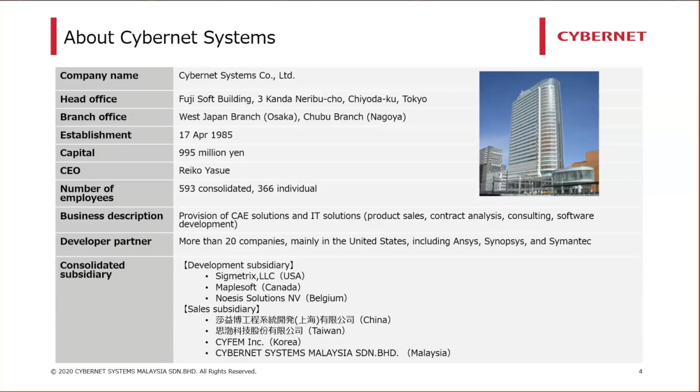We have developed partnerships with more than 20 companies, mainly in the United States, including Ansys, Synopsys, and Symantec. The sales subsidiaries of Cybernet Systems consist of Cybernet China, Cybernet Taiwan, CYFEM which is based in Korea, and of course Cybernet Systems Malaysia.

Cybernet Systems has been working with numbers of group companies around the world for both sales and development. Our development subsidiaries include Noesis, Maplesoft, and Sigmetrix. And of course, our sales subsidiaries consist of Cybernet Japan, China, Taiwan, Korea, and also Cybernet Malaysia.

A little introduction about Cybernet Systems Malaysia. Cybernet Systems Malaysia Sdn Bhd's office is in KL Eco City, located in Bangsar, and has been around for more than a year now. Cybernet Systems Malaysia was established in November 2018 as the fourth subsidiary in Asia, after China, Taiwan, and Korea.

Our business here mainly revolves around CAE solutions, IoT and big data solutions, and also professional services or engineering services. Our partners up until this point in time include Ansys, Synopsys, and many others.

Like I mentioned before, Cybernet Systems provides all sorts of solutions to meet our customers' needs. Those solutions are CAE solutions, which give total support of CAE utilization in various fields. The main application areas in CAE solutions include mechanical system, fluid system, control system, optical system, and also electrical systems. We also have AR and VR solutions.

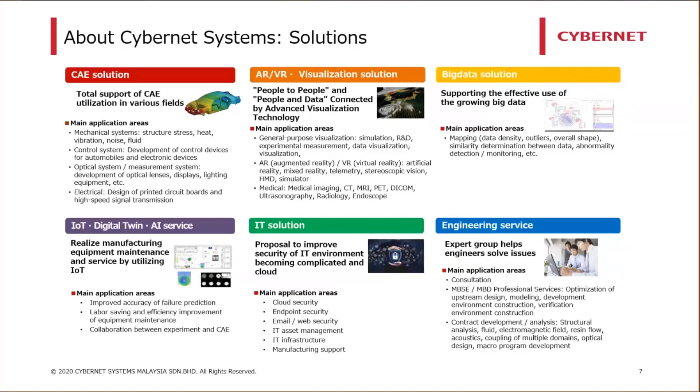This includes application areas around general purpose visualization, AR and VR, and also medical imaging. Then we have big data solutions, IoT, digital twin, and AI service, IT solution, and of course engineering service. Our engineering service is basically a group of experts that helps engineers solve issues. The main application areas include consultation, MBSE professional services, and contract development and analysis.

Before we get into how digital engineering can help improve the construction industry in several ways, let's highlight some of the demands from the end users and also the challenges faced by construction industries nowadays.

Now let's take a look at some of the demands and expectations from the construction industries by the end users. These are some of the important aspects, in my opinion. First, perhaps the most important aspect that needs to be taken into consideration when designing or building construction is safety.

Since the first industrial revolution, safety has been deemed to be the most important aspect in every industry. As the world gets more and more advanced, the demand for a higher level of safety standards keeps on rising as well. Therefore, the task of designing any kind of construction becomes more and more complicated and more challenging.

Next is to create more environmentally friendly buildings and construction. Nowadays, every industry is required to comply with a lot of standards and regulations that revolve around the environmentally friendly theme.

For this, the construction industry needs to be clever in tackling some of the environmental problems during the entirety of a project. It includes being smart in the choice of materials used, being smart when designing the building itself, logistics, and so on and so forth.

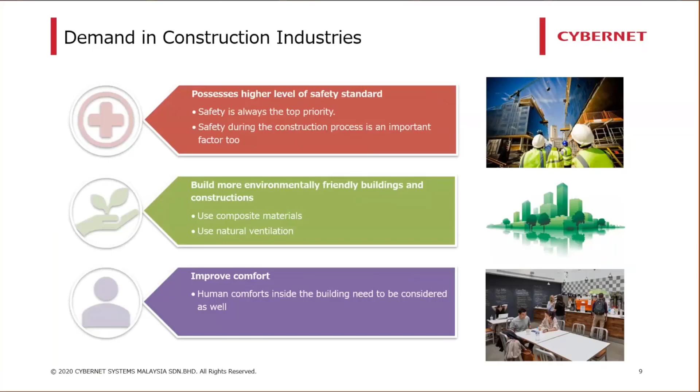And finally is to improve human comfort. When designing a building, how well a person inside feels can be a deciding factor whether there will be any occupant inside the building at all. This factor subsequently affects the whole project at the very end, and thus becomes an important factor to be taken into consideration.

Now, next, we take a look at some of the challenges currently faced by the construction industry. These challenges have been around for quite some time now. Common problems such as streamlining construction crew management and labor shortage are still a headache. But apart from those, there are some other issues the industry needs to tackle as well.

The first one will be technology adoption in the construction industry. When we compare how well industries adopt new technologies, construction seems to be lagging behind compared to others. As proved by the manufacturing industry, technology adoption opens up new opportunities for the industry to improve their way of working, subsequently boosting their productivity and ultimately improving their efficiency.

Now, next, let's talk about material costs. In 2018, some of the key materials for construction rose almost 10% from the previous year. According to the Associated Builders and Contractors, raw material costs rose by 2.2% in June this year.

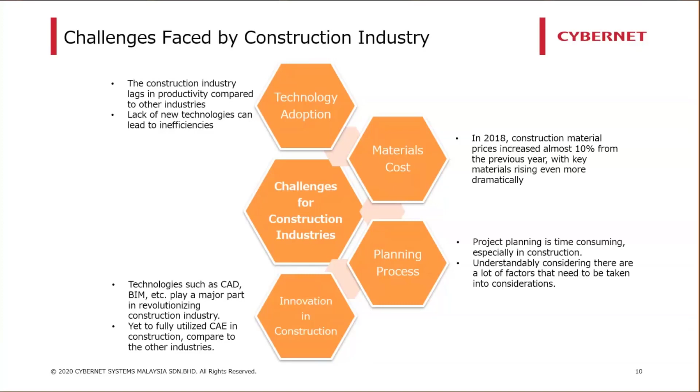The adoption of CAD and BIM was the last significant technological innovation in construction. Like I mentioned earlier, the demand from the end user makes for a more complicated task that requires more than just a traditional way of solving a problem.

Now let's dive into what is meant by digital engineering and how it can be beneficial for the construction industry. By definition, digital engineering is the advanced computerization of systems engineering practices. We can think of it as the art of creating, capturing, and integrating data using a digital skill set, from drawings and 3D models all the way to simulations. Engineers are increasingly using advanced technologies to capture data and craft designs in a digitized virtual environment.

Now, for today's webinar, we are going to focus on one aspect of digital engineering, and that is computer-aided engineering, or CAE. CAE is part of the broad definition of digital engineering. So basically, CAE focuses on creating a virtual world in which to simulate a real-life problem.

Now, unlike what many people think, CAE actually goes beyond the analysis and development stage. CAE actually defines the entire product engineering process, from initial design creation, through virtual testing with sophisticated algorithms, all the way to the maintenance process. It allows a dynamic testing process to support the engineering process by numerically simulating the physical properties of a product or design in various conditions and environments without the need to make a physical prototype.

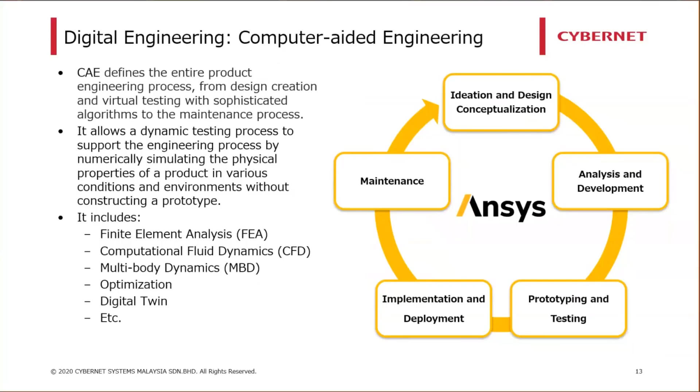So nowadays, getting access to a powerful, high-performance computer is not as big of a problem anymore compared to, let's say, 10 years ago. With that level of accessibility, I believe that every industry, including construction, should be able to use computer simulation software. Now, with that said, here are some several benefits of CAE.

The first one is that construction designs can be evaluated and refined using computer simulations rather than physical prototype testing, therefore saving money and time. What CAE can offer is to help engineering teams manage risk and understand the performance implications of their designs. Like I mentioned before, when the highest level of safety is required, CAE allows engineers to simulate almost every situation, leaving no room for errors.

Next, CAE can provide performance insights earlier in the development process, when design changes are less expensive to make. Predicting faults and failures is important in construction. With CAE, these failures can be predicted way before they even happen in real life, when the construction has already taken shape.

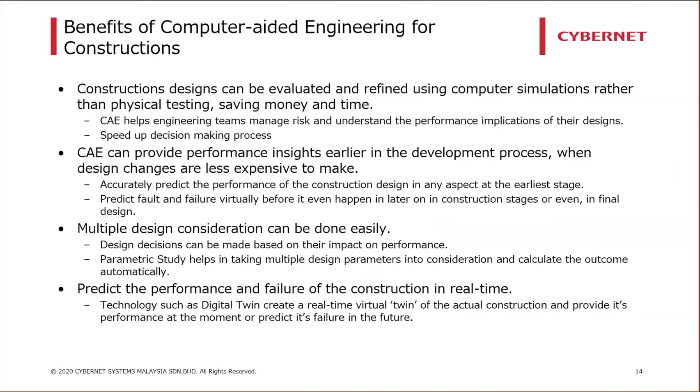Now, CAE has been around for a long time. Since the beginning, Ansys has been providing one of, if not the most, powerful and advanced CAE software of them all. Ansys specializes in simulating highly complex problems, delivering accurate results while providing an easy-to-use operating environment.

For 50 years, Ansys has been the class-leading multi-physics simulation software provider. Due to that very fact, Ansys now has over 45,000 global customers worldwide. Ansys is also used in a wide range of industries, including automotive, electric and electronics, aerospace, and many more.

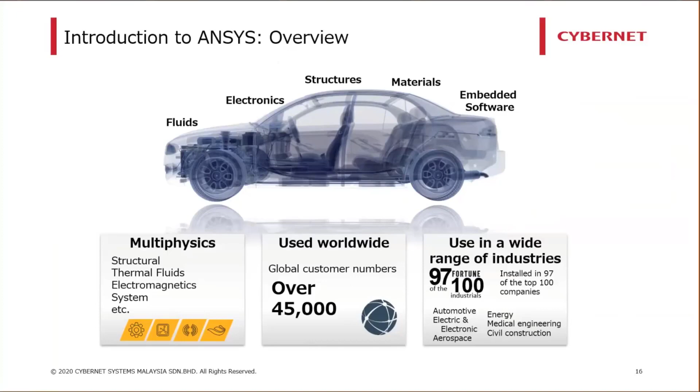As I said before, Ansys provides multiple physics simulations for every type of need. The physics include mechanical solutions, with analysis under mechanical solutions including static structural analysis, dynamic analysis, impact analysis, heat transfer or thermal analysis, fatigue analysis, and so on.

Next, we have the fluid solutions. Analyses included are general purpose thermal fluids analysis, rotating mechanical fluids analysis, and so on. Then, of course, we also have the electronic solutions, which include electromagnetic field analysis, signal integrity, power integrity, and electromagnetic interference analysis. Next, we have the design solution.

The design solution is mainly for designers and CAD users, done using the Ansys product called Ansys Discovery. Lastly, you also have several additional options included under the Ansys solution, which include a parallel computing module, material data selection library, and so on.

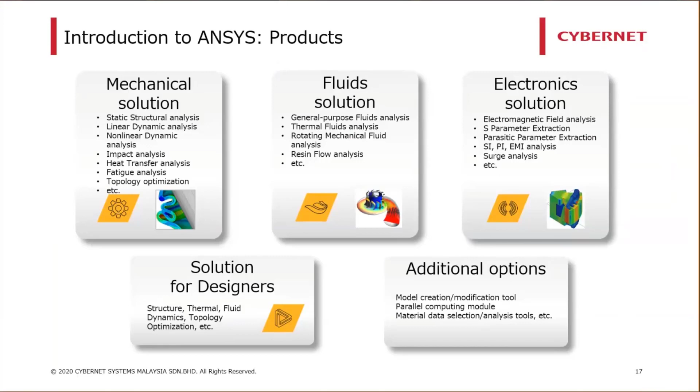Now let's take a closer look at how Ansys works by going through this next analysis. For this one, we have a model of a truss bridge. We were using Ansys Mechanical 2020 R2, which is the latest Ansys Mechanical software right now. As you may already know, structural and vibration analysis are part of the mechanical solution. As for the license for this type of analysis, we need at least Mechanical Premium.

Basically, there are three types of licenses for Ansys Mechanical: Mechanical Pro, Premium, and Enterprise, with Mechanical Pro being the entry-level license, and Enterprise the top-of-the-range license, which includes everything under the mechanical solution. You can check the Ansys website for full license capabilities.

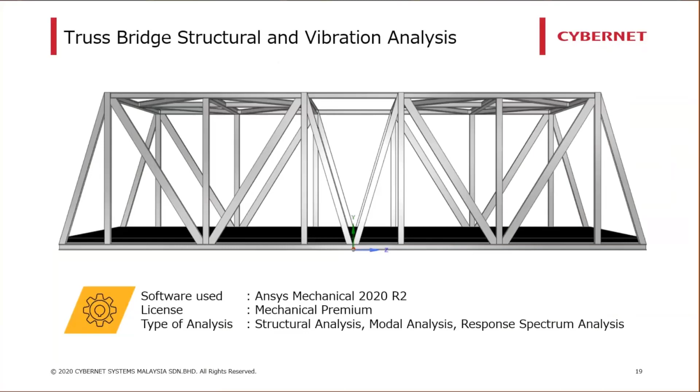As for the type of analysis included in this particular case, we have a structural analysis, modal analysis, and also response spectrum analysis. So basically, the objective here is to study the deformation and stress imposed on the truss bridge under a seismic load.

Here on the screen is the analysis workflow for this particular case. We started with a structural analysis to determine the pre-stress condition of the truss bridge under its own weight. Then we coupled a modal analysis to the static structural analysis to determine the natural frequencies and mode shapes of the truss bridge. Modal analysis is actually very important to determine the critical mode shape to be used in later analysis.

Finally, we coupled the response spectrum analysis to the modal analysis to determine the stress and deformation of the truss bridge under a seismic load. This type of case is made easy thanks to the ability of Ansys to link multiple analyses together. This way, the user doesn't have to manually key in the data from the previous analysis to the next one multiple times, thus saving a lot of time.

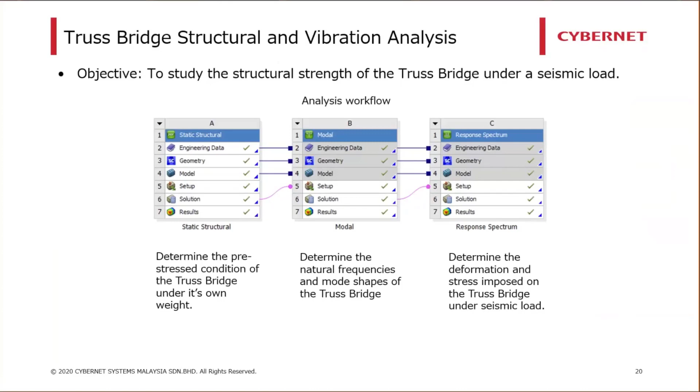Material used for this particular case are structural steel and also asphalt. Ansys has the ability to allow users to key in any type of material using its engineering data. Therefore, if users have material data at their disposal, they can easily key in those data inside Ansys.

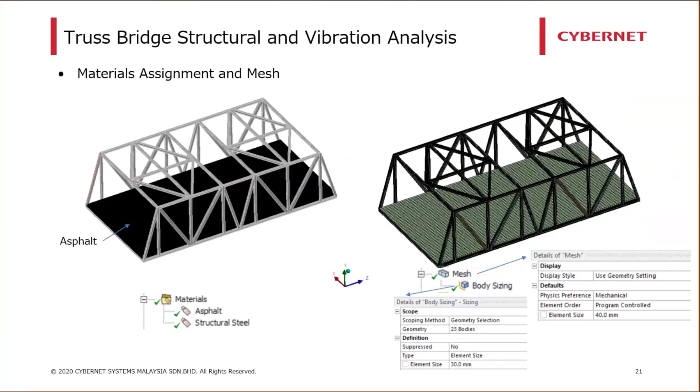Next, we get into the meshing of our model. Users can have a variety of mesh control. For this particular example, the global mesh was set at 40 millimeters, while a certain part of this model was meshed locally with a 30 millimeter element size.

Next, in the static structural analysis, we have the standard Earth gravity as one of the loading conditions. The whole model was subjected to a gravitational force. Then we fix both ends of our bridge here to basically fix the whole structure into place.

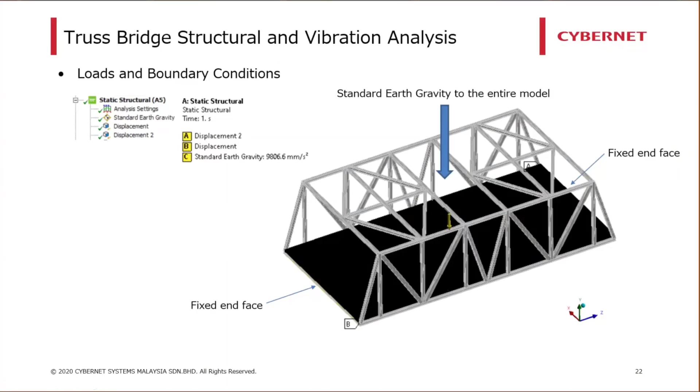After setting up our loads and boundary conditions, we continue with the calculation. The time needed for the calculation depends on several factors, including the number of elements of the model, the CPU speed, and also the number of cores that you are running with.

As for the static structural analysis, we just want to quickly study the deformation and stress of the bridge under its own weight. The maximum deformation is around 0.7 millimeter, while the max equivalent stress is around 76 megapascals, which is under the max yield strength of the material we are using. Therefore, in this condition, we can say that the bridge is safe to use.

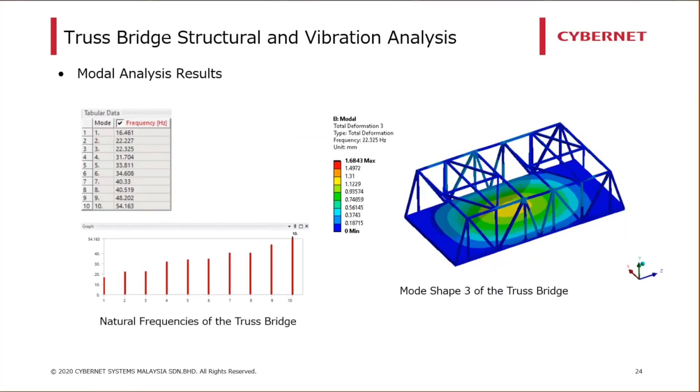So next we move on to the next analysis, which is the response spectrum analysis. Response spectrum analysis is basically a method to estimate the structural response to short, non-deterministic transient dynamic events, such as earthquake.

This particular seismic data sample that we are using here was gathered from a sample from Savannah River Site disaggregated seismic spectra.

Now, from the modal analysis, we know that the effective mass is the highest in the y direction. Therefore, the seismic load that we apply to our structure here is subjected in the y-axis.

Now, as for the mode combination method, we are using the Rosenblueth method, because the spacing of the modes are closely spaced together. And of course, in Ansys, different methods such as SRSS and CQC method can also be used depending on the model.

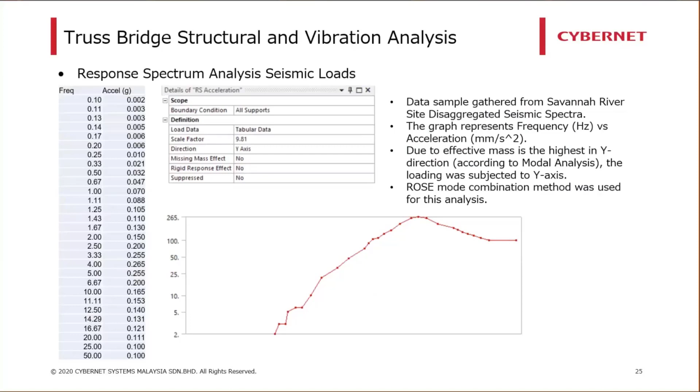Then finally, after running the calculation, we can see the results of the deformation and stress imposed on the bridge with the inclusion of seismic load. Note that these values of the deformation and stress are on top of the values that we get from the static structural analysis. In this case, under the seismic load that we just applied to our structure, we can say that the bridge is still within the safe side in terms of structural performance.

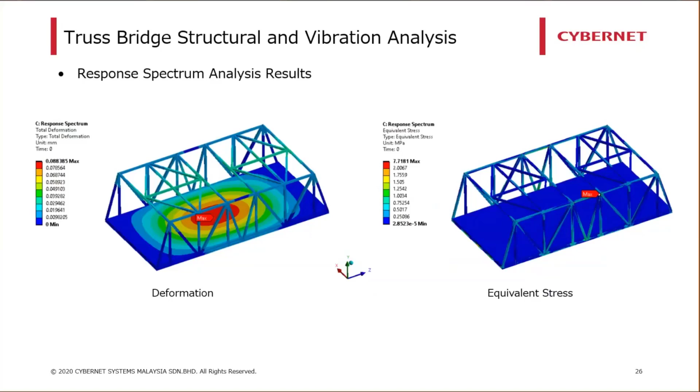So now let's continue with some more examples of Ansys capabilities. For the next part, we are just going through the results of the analysis and which Ansys product that we were using.

So here we have the first example, a fatigue analysis. This analysis is basically done to study the durability of a structure and its components. For this particular analysis, we were using Ansys Mechanical.

Almost the same as before, we were using vibration analysis, to be specific, harmonic response analysis, to see how long it takes before the structure fails.

Note that the model we are using here is actually a quarter of an actual model. You can imagine that this actual structure is symmetric in the XZ plane and also the YZ plane. This way, we can save a considerable amount of simulation cost because basically we are just cutting the whole model into 4, therefore cutting the simulation cost into 4 as well.

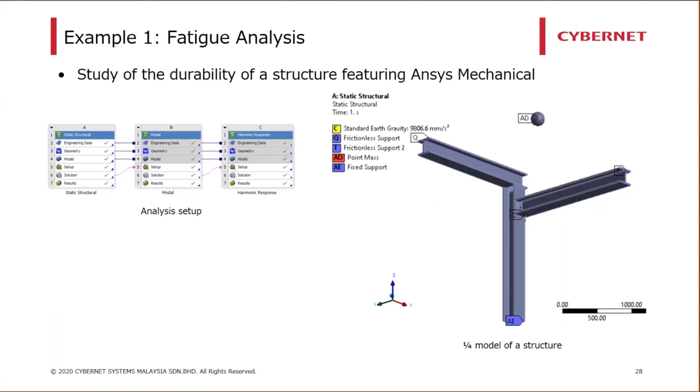Now, as for the loads and boundary conditions, a point mass was attached to the structure to simulate the weight applied to the structure, with the inclusion, of course, of the standard Earth gravity.

So here are the results from our analysis. On the left side, we have the stress from a static structural analysis before harmonic loads were applied. On the right side is the result of the stress imposed on the structure after we've done the harmonic response analysis. As you can see, due to the vibration input, the stress on the structure increased drastically.

Now, mind you that for this particular example, the harmonic loads are exaggerated a little bit, basically to simulate a worst case scenario.

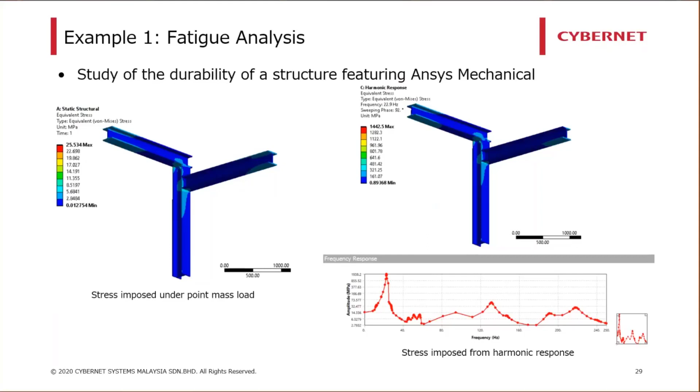Now, after we've done with the harmonic response analysis, we can start calculating the life of the structure using a fatigue tool. This particular tool is included in the Ansys post-processing, therefore it did not require an additional analysis cell.

From the previous analysis, we know that the maximum amplitude occurred at a frequency of 22.929, as you can see here. Using that information, we can calculate how long it takes before the structure fails.

As you can see, certain critical parts of the structure fail almost immediately, while the longest time that certain parts of the structure can survive was around 43,000 seconds.

With Ansys, we can also choose to view the results of specific components of the structure. In this case, we see that the bracket failed after 20.9 seconds.

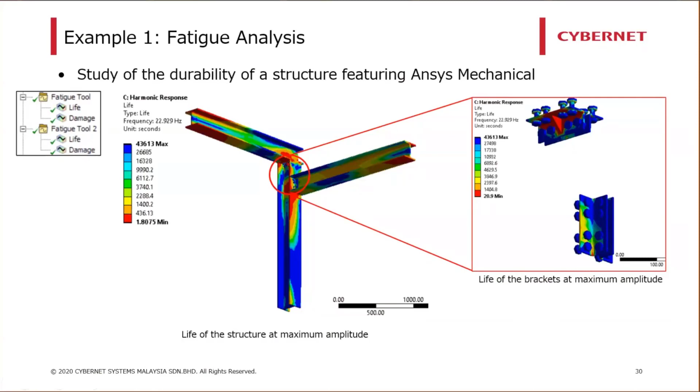So next here we have the explicit dynamic analysis. First, let me explain briefly about the difference between implicit and explicit dynamics. Basically, implicit and explicit refer to two types of time integration methods used to perform a dynamic simulation.

Implicit method is usually used when the problem time magnitude is relatively large, let's say about 1 second to 10 seconds, something like that. While explicit method is used when the problem time magnitude is really, really small - we are talking about a few milliseconds and even microseconds in some cases.

There are three products within Ansys that can be used for explicit dynamics. Those products are Ansys LS-DYNA, Ansys AutoDyn, and also Ansys Explicit Dynamics. In this particular example, we were using Ansys LS-DYNA.

Now, this example is about a concrete pier impact test. Because an impact test happens in such a short time, explicit dynamic analysis is required. The model that we were using includes the pier, which is made out of concrete and structural steel for the rebar.

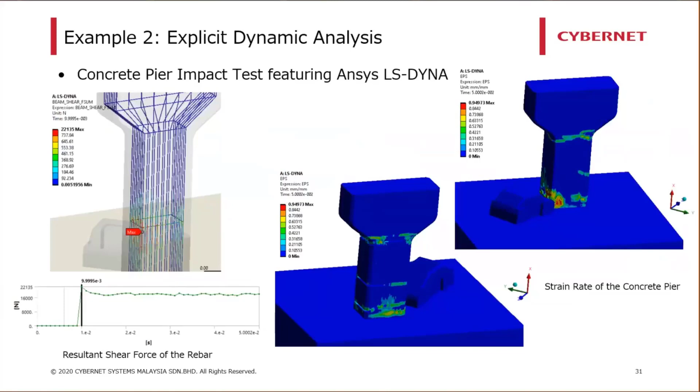Ansys Fluent is one of the most powerful CFD solutions that you can get your hands on. Ansys Fluent features a Fluent solver that can basically calculate all sorts of fluid dynamics analysis. For this particular example, we wanted to know the fluid behavior around the Putra Mosque.

This type of analysis is great when users are trying to take advantage of the natural wind to ventilate the interior of the buildings.

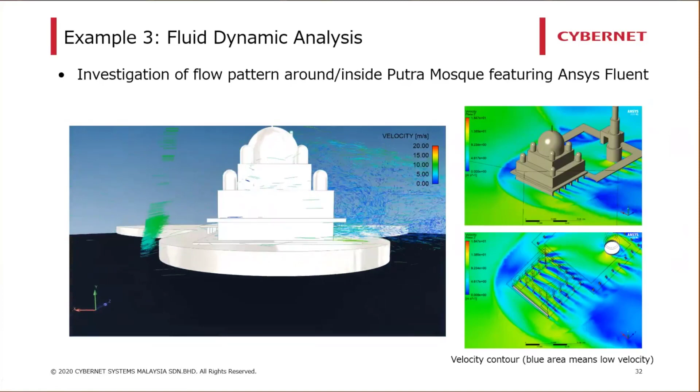Now, this video shows where the vortices occur inside and around the buildings. And then on the right side, the photos show the velocity contour that shows the wind speed around and, of course, inside the building as well.

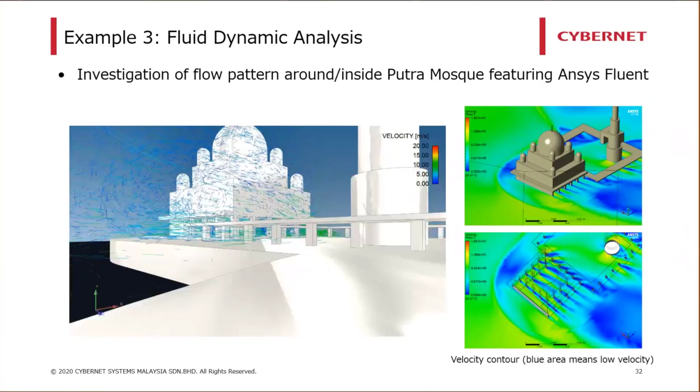Where the blue area means lower velocity and the green area means higher velocity.

Now, for this example, it's basically the same as the one before. But for this particular example, we would like to study how the fluid behaves around a series of buildings, simulating a small region of a high-rising city.

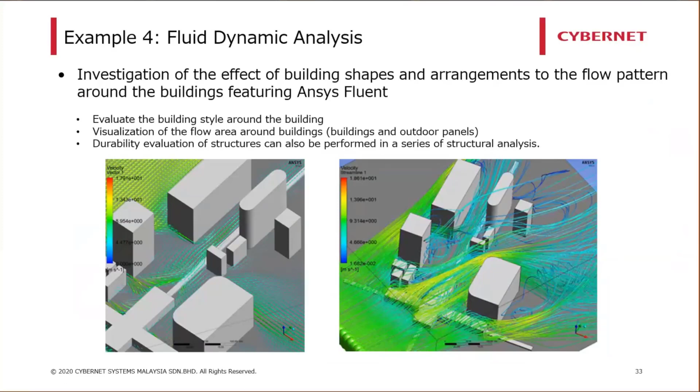From this analysis, we can determine which region was excluded from the wind and which buildings are most affected. If you want, you can also perform a structural analysis using the data from this CFD analysis to study the integrity of the building under wind load, which brings us to the next example.

Now, this is an example that showcases the fluid structural interaction capabilities of Ansys. Ansys is capable of doing a fluid structural coupling analysis. You can do either strongly coupled analysis or weakly coupled analysis.

Strongly coupled analysis means both fluid and structural analysis are solved simultaneously, while weakly coupled analysis solves the problems one at a time. In this particular example, we have one of the weakly coupled analyses of a windmill.

First, we studied the pressure on the windmill surface by using Ansys Fluent. From the data that we get from Ansys Fluent, we can easily couple it to the static structural analysis to determine the stress and deformation of the windmill.

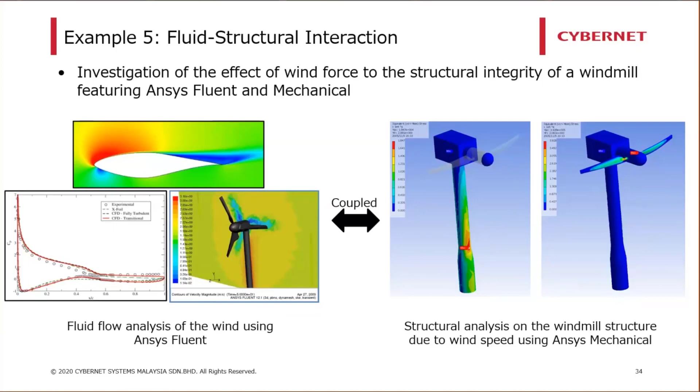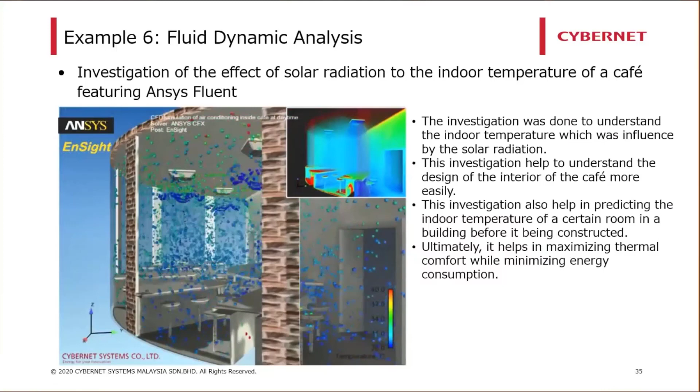Now, still with the fluid dynamic analysis, here we have the investigation of the effect of solar radiation to the indoor temperature of a cafe, featuring Ansys Fluent. The investigation was done to investigate the indoor temperature, which was influenced by the solar radiation. This investigation helps to understand the design of the interior of the cafe more easily, and helps in predicting the indoor temperature of a certain room inside a building before it being constructed. So ultimately, by doing this analysis, we can understand more about the indoor temperature of a certain room, thus helping in maximizing the thermal comfort while minimizing the energy consumption.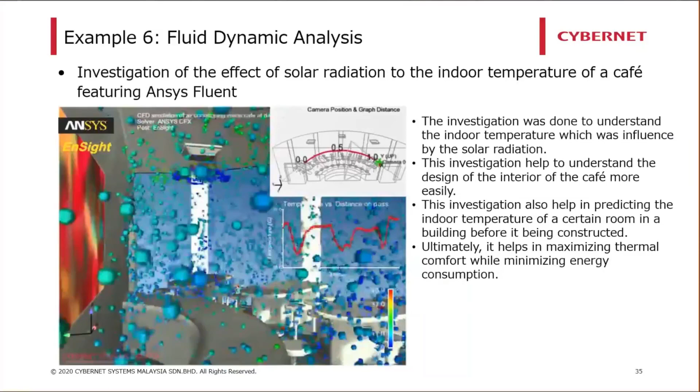And then finally, let's take a look into the science of material by using Ansys. This is a microstructure homogenization analysis and also structural analysis featuring Ansys mechanical and Multiscale.Sim.

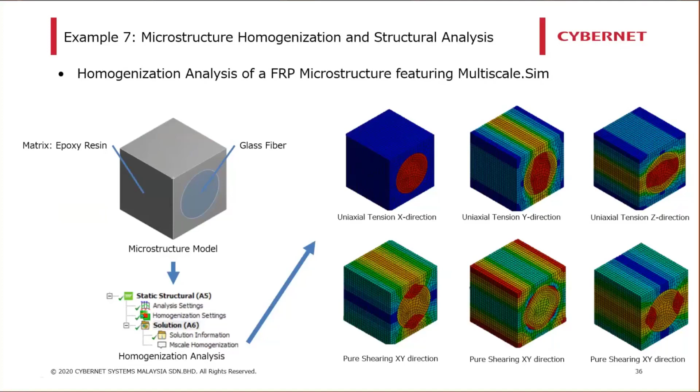Basically, what happened during the homogenization analysis is a series of uniaxial tension and pure shear tests, as you can see on your screen right here. As a result from the homogenization analysis, the users can evaluate the macroscopic material response as a stress strain curve, which is then used to evaluate the equivalent material properties.

So this is the result from our homogenization analysis just now. As you can see, we can determine the composite's Young's modulus, shear modulus, Poisson ratio, and also its density. Now, from here, we can export this data to Ansys engineering data, which the latter can be used to apply to any sorts of structure that we choose from.

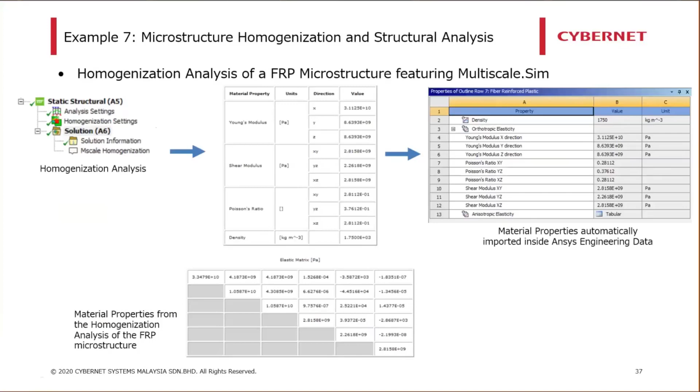So next we move to a static structural analysis using the material properties that we've just got from the homogenization analysis via Multiscale.Sim. This structure right here was made out of material that we've just analyzed just now. Like any structural analysis, we basically wanted to study the stress and deformation of this structure.

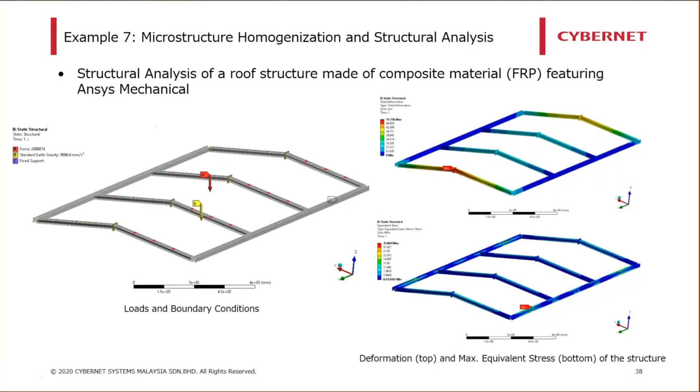Now, from this structural analysis, we can later compare the structural performance of the roof structure with different types of material used. As you can see on the screen right here, our composite material that we made just now performs better in terms of maximum equivalent stress compared to the structural steel and also the aluminum alloy. Plus, the composite material is at least 4 times lighter than the structural steel and at least 1.5 times lighter than the aluminum alloy. Therefore, from this analysis, we know that the composite material will be a better choice compared to the other two materials.

Now, the possibility doesn't end there. You can make all sorts of material composition using Multiscale.Sim, comprised of whatever material that you choose from. And then you can run the homogenization analysis to get the material properties. Using the material properties that you've just got, you can apply it to any structure model of your choice. That's basically the advantage of Multiscale.Sim.

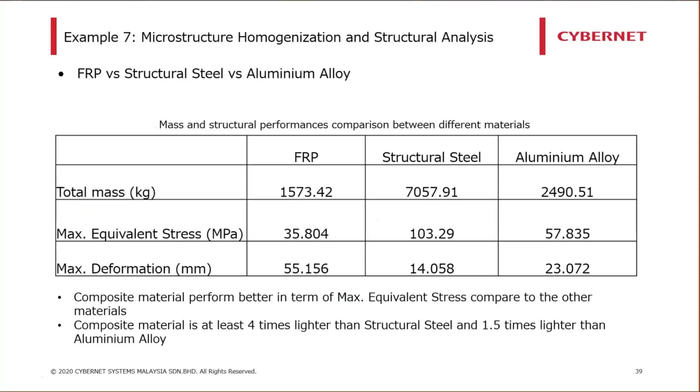To summarize, based on the examples of the Ansys capabilities that I've just shown you, I believe the construction industry has a lot of opportunities to improve by utilizing digital engineering. With the ever-growing computer technologies that we have access to today, I believe that CAE can help in boosting productivity, reducing downtime, and ultimately maximizing efficiency. By including CAE in the planning process, certain elements of the project can now be determined, thus helping in innovation and creative efforts for this industry.